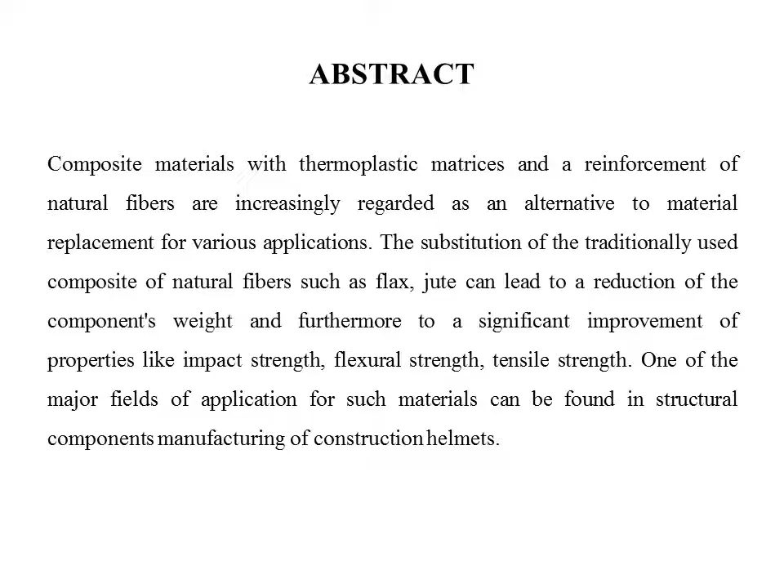Abstract. Composite materials with thermoplastic matrices and a reinforcement of natural fibers are increasingly regarded as an alternative material replacement for various applications. Substitution of traditional composites with natural fibers such as flax and jute can lead to reductions of component weight and significant improvement of properties like impact strength, flexural strength and tensile strength. One major field of application for such materials is structural components and manufacturing of construction helmets.

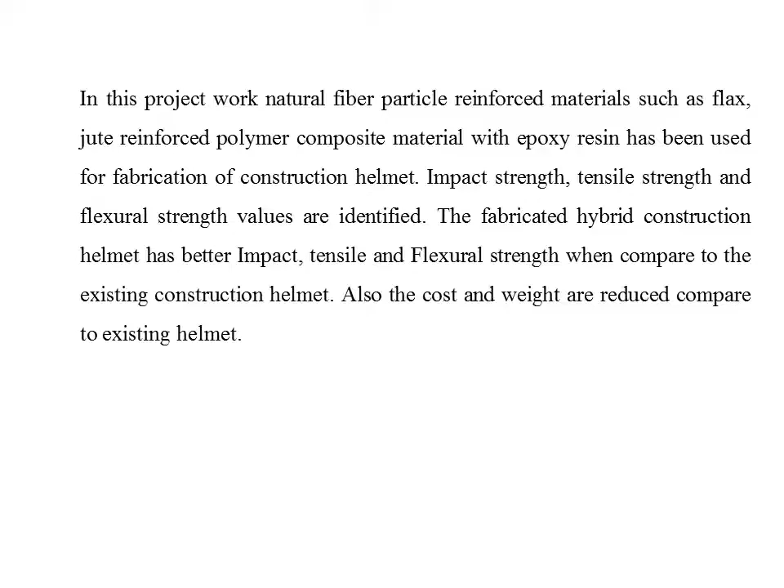In this project work, natural fiber particle reinforced material such as flax and jute reinforced polymer composite material with epoxy resin has been used for fabrication of a construction helmet. Impact strength, tensile strength and flexural strength values are identified. The fabricated hybrid construction helmet has better impact, tensile and flexural strength compared to existing construction helmets, and the cost and weight are also reduced compared to the existing helmet.

Problem identification. Several chemicals used to produce plastics are hazardous for human health and the environment. Their degradation products may be released during the life cycle of the plastic product. The plastic polymers themselves are not considered toxic, but plastic products may contain non-bound residual monomers, polymerization chemicals, by-products, and additives which have toxic properties. Many additives are hazardous for human health and the environment.

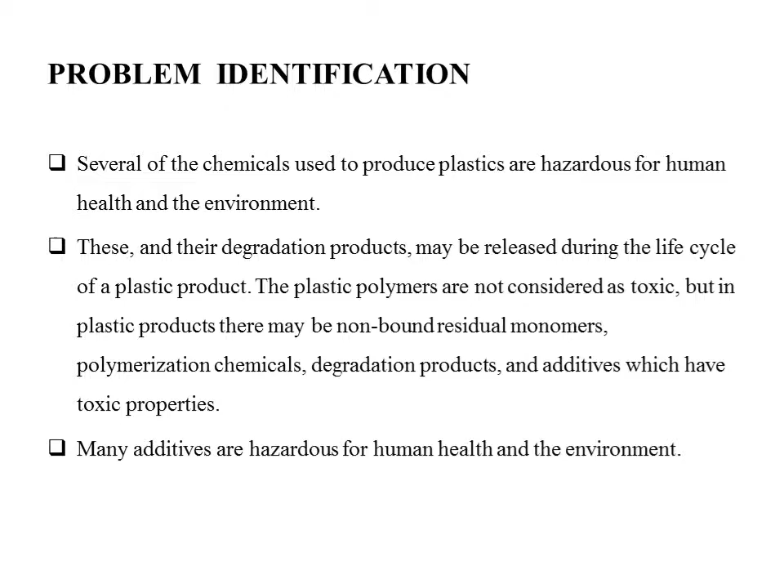Overview of composite materials. Composites are a combination of two or more materials in which one is the reinforcing phase and the other the matrix phase. Composite materials are usually classified by type of reinforcement, such as polymer composites, cement and metal matrix composites. Polymer matrix composites are the mostly commercially produced composite, in which resin is used as the matrix with different reinforcement materials. There are different types of fiber, natural and man-made, for different applications.

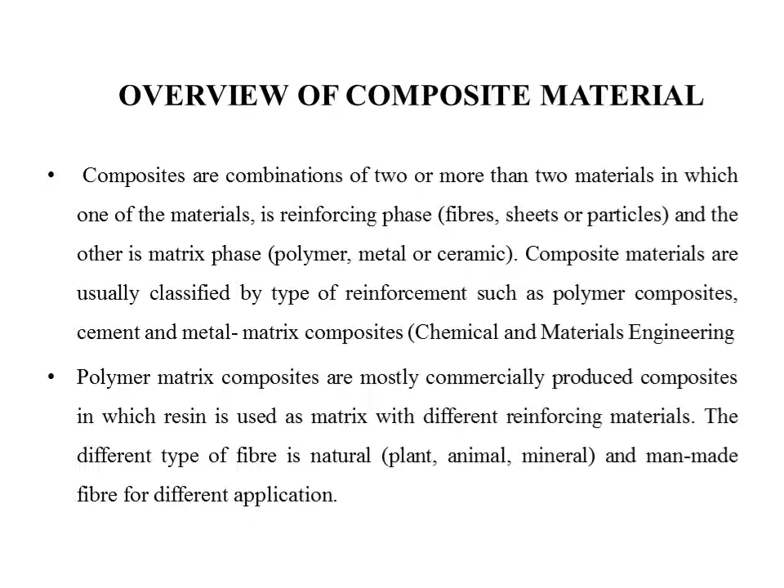Classifications of natural fibers. Natural fibers are classified into three categories: plant fibers, animal fibers and mineral fibers. Plant fibers are an important type of natural fiber and are generally comprised mainly of cellulose, hemicellulose, lignin and pectin. Prominent natural fibers are cotton, jute, flax, ramie and hemp. Cellulose fibers are mainly used in manufacturing of paper.

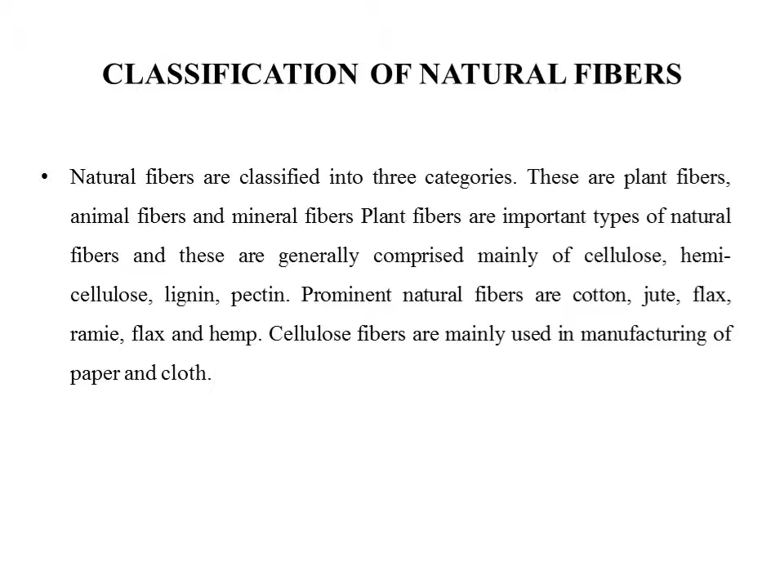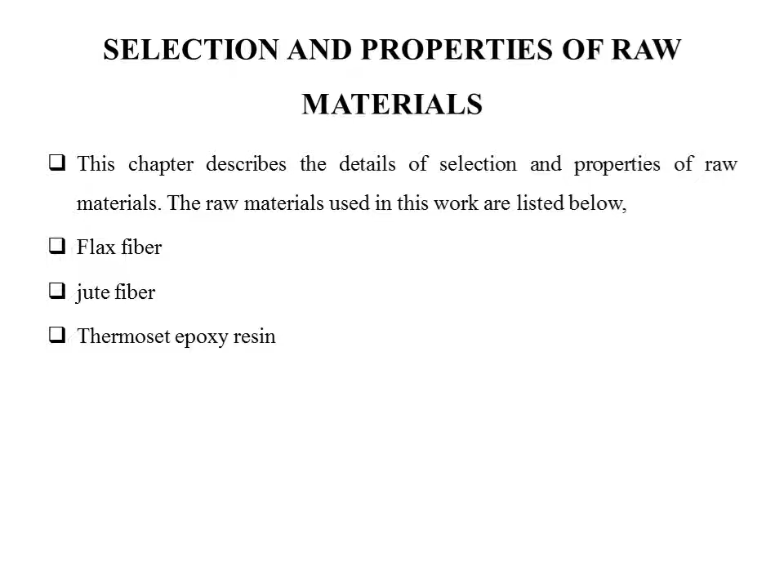Selection and properties of raw materials. This chapter describes the details of selection and properties of raw materials. The raw materials used in this work are listed below: flax fiber, jute fiber, and thermoset epoxy resin.

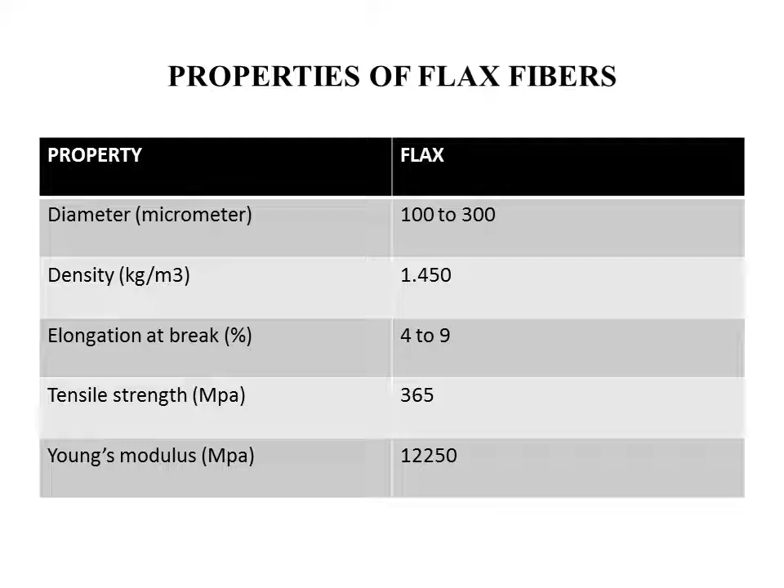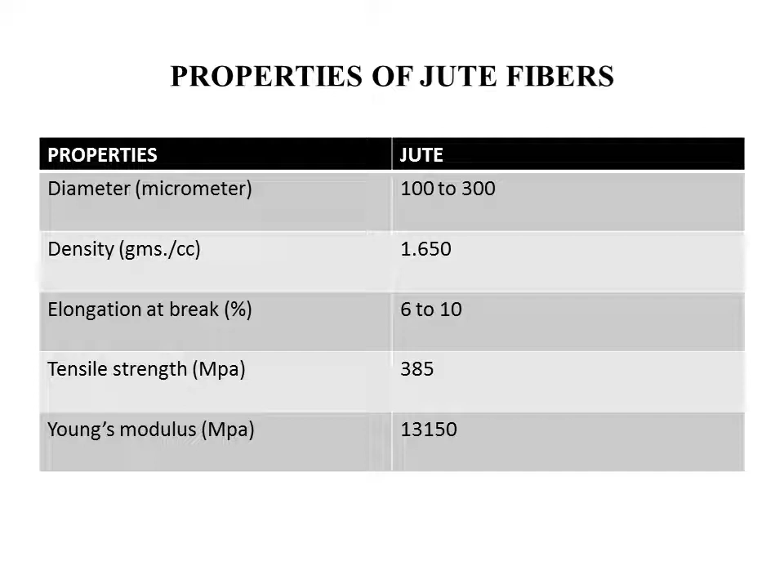Properties of flax fiber: diameter is 100 to 300 micrometers, density is 1.450 kilograms per cubic meter, and elongation percentage at break is 4 to 9. Tensile strength is 365 megapascals and Young's modulus is 12250 megapascals. Jute fiber diameter is 100 to 300 micrometers and density is 1.650 grams per cc. Elongation percentage at break is 6 to 10, tensile strength is 385 megapascals, and Young's modulus is 13150 megapascals. Compared to flax fiber, jute has a higher Young's modulus value.

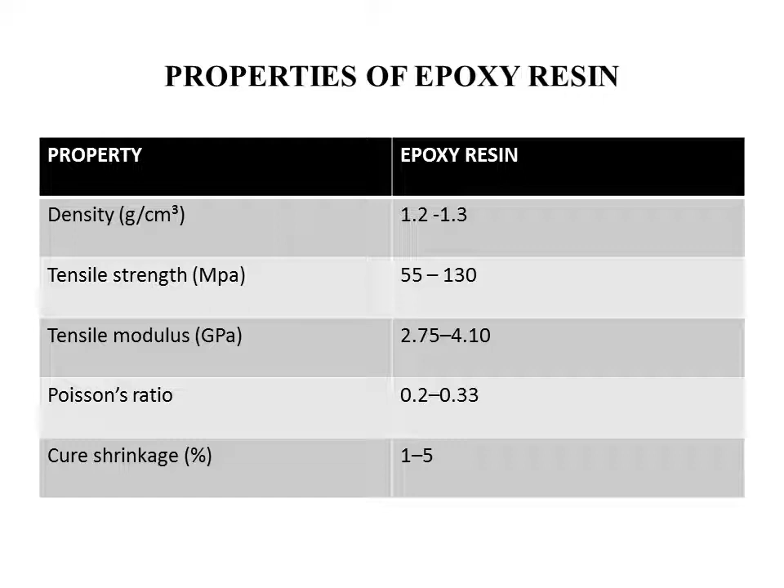Properties of epoxy resin: density is 1.2 to 1.3 grams per cubic centimeter, tensile strength is 55 to 130 megapascals, and tensile modulus is 2.75 to 4.10 gigapascals. Compared to other epoxy resins, this has very good tensile modulus. Poisson ratio is 0.2 to 0.33, and shrinkage percentage is 1 to 5.

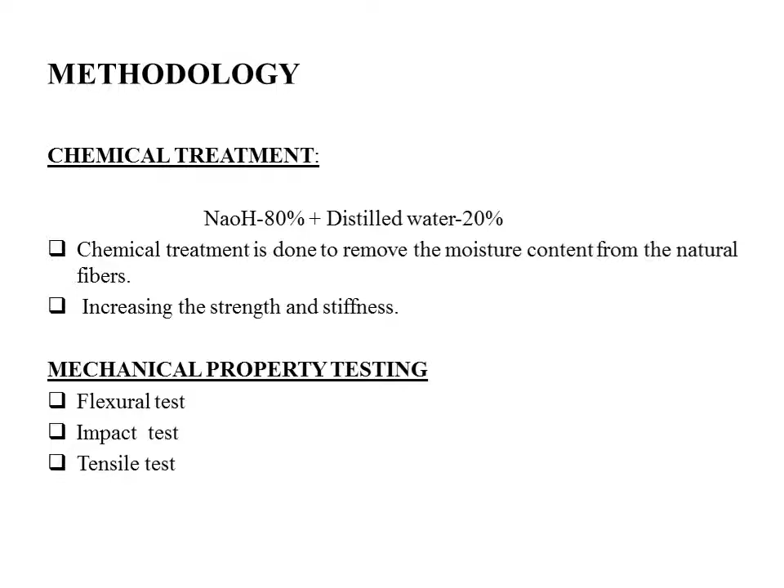Methodology: chemical treatment. 80% sodium hydroxide is mixed with distilled water at 20%. After the chemical treatment, this is done to remove the moisture content from the natural fiber, increasing the strength and stiffness. Mechanical property testing includes flexural test, impact test and tensile test.

Fabricated industrial safety helmet. This is our fabricated helmet.

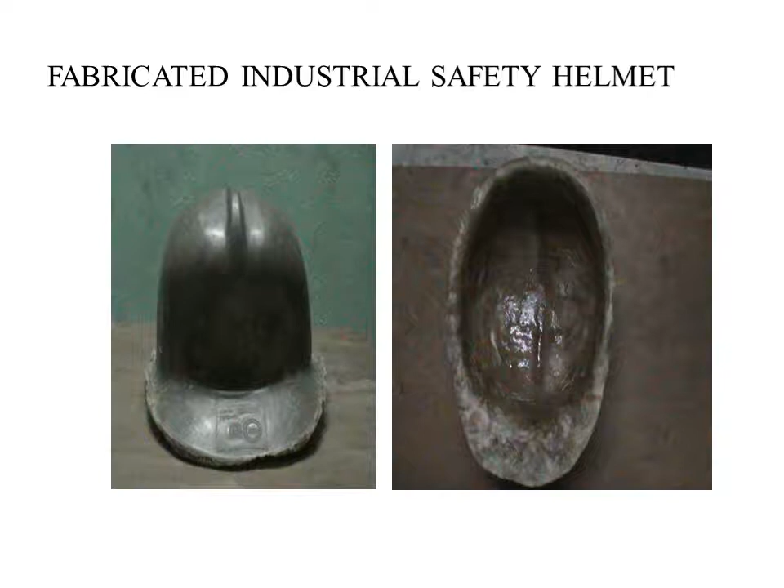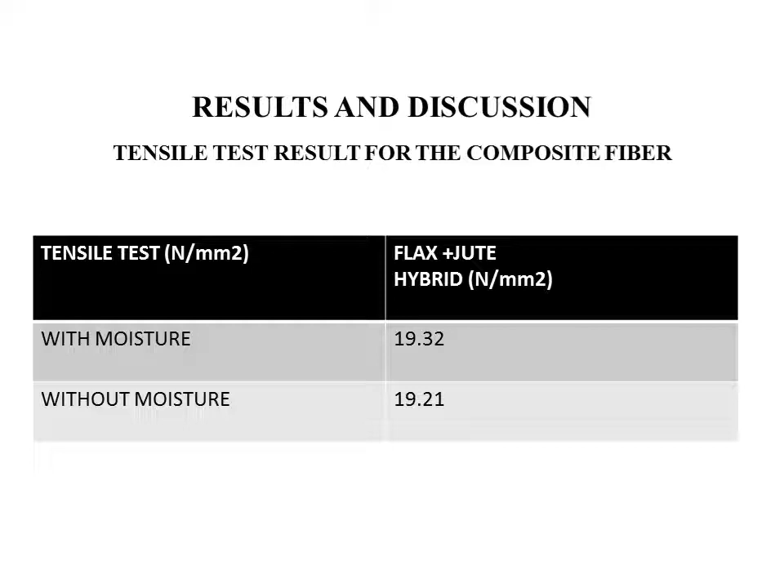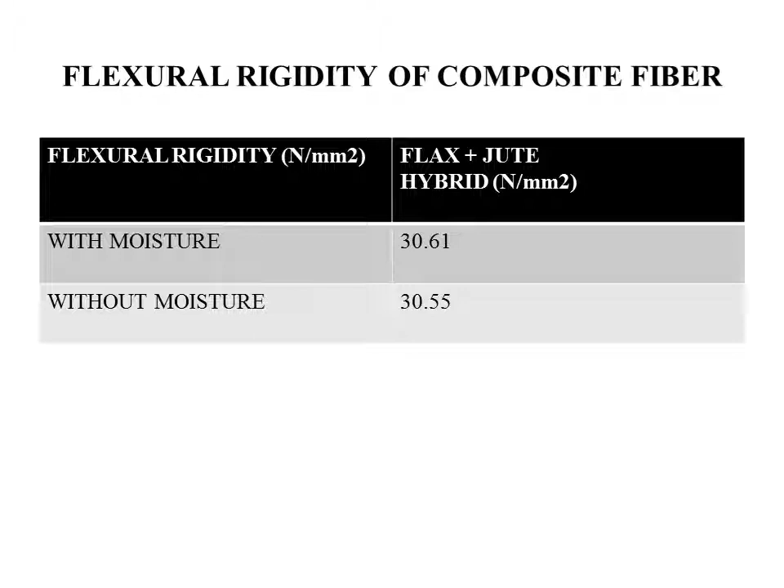Comparison of ABS plastic and hybrid composite helmet. Weight of the ABS plastic is 370 grams and the hybrid composite helmet is 252 grams. Tensile strength of the ABS plastic is 20 Newton per mm squared and the hybrid helmet is 19.32 Newton per mm squared, which is close to the ABS plastic.

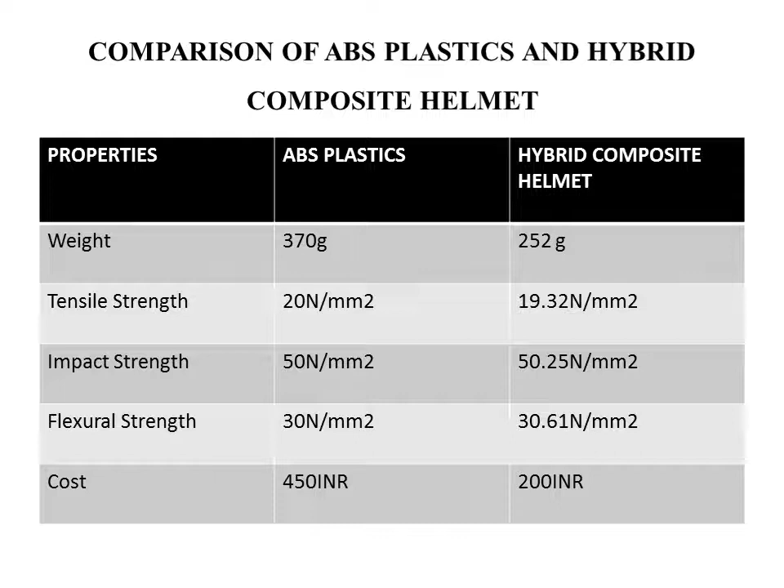Impact strength of the ABS plastic is 50 Newton per mm squared and the hybrid composite helmet is 50.25 Newton per mm squared. Flexural strength of the ABS plastic helmet is 30 Newton per mm squared, but our composite helmet is 30.61 Newton per mm squared. Cost of the ABS plastic helmet is 450, but our composite helmet is 200, a reduction rate of 250.

Merits of composites: tensile strength of composites is 4 to 6 times greater than steel or aluminium, depending on the reinforcement. Improved torsional stiffness and impact properties. High fatigue endurance limit, 30% to 40% lighter, for example compared to aluminium structures designed for the same function requirements. Lower embedded energy compared to other structural metallic materials like steel and aluminium. Composites are less noisy in operation and provide lower vibration transmission than metals.

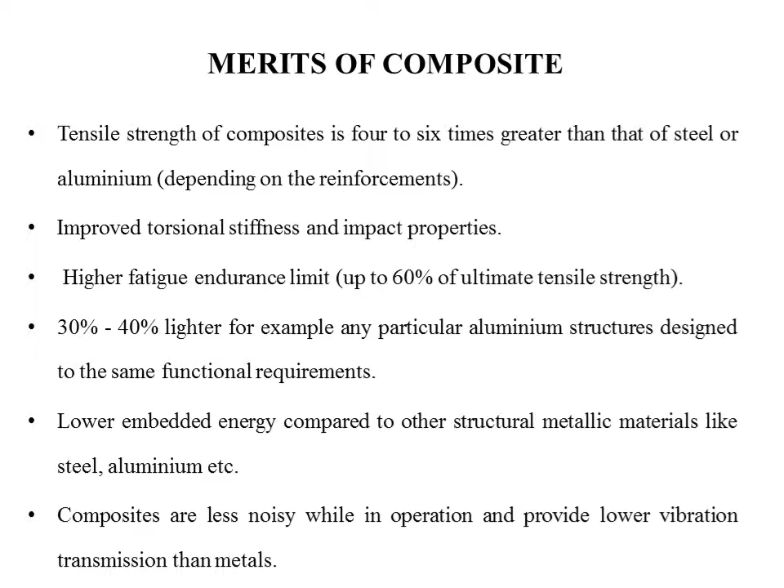Conclusion: After determining the material properties of natural fiber reinforced composite using flexural test and tensile test, the hybrid composites show comparatively better performance. It has been shown that natural reinforced composite materials of flax and jute hybrid material have sustainable strength for the application of construction helmets. From the experimental method, the two fibers jute and flax make a hybrid composite which possesses better strength and reduces the weight to nearly half of the original. Hence, it is better to replace acrylonitrile butadiene styrene plastic construction helmets with a hybrid composite material.